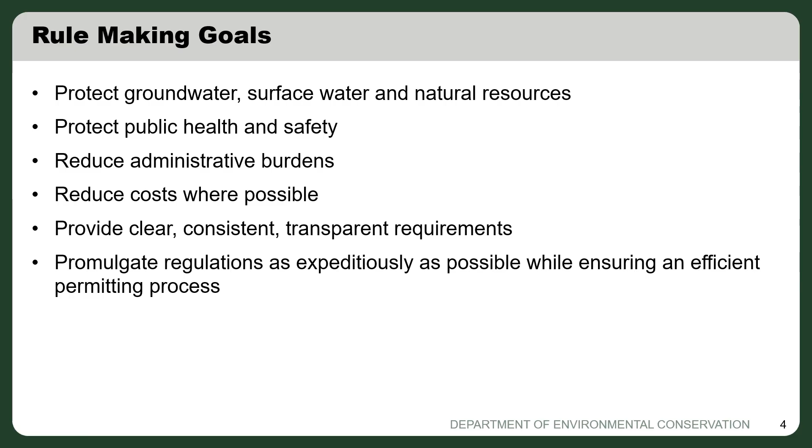The rulemaking will focus on the drilling and installation of deep, closed-loop geothermal boreholes and deep closed-loop stratigraphic test wells drilled deeper than 500 feet. It will not address a whole host of other issues, including open-loop or standing column geothermal wells deeper than 500 feet, which are regulated under the existing Article 23 regulatory program. The rulemaking will not address any type of shallow geothermal well, and as Kevin said, will not address disposal of drilling fluids and waste generated during drilling and completion operations.

These are addressed by existing regulations, which Beth and Kathy will speak to shortly. The rulemaking will not make any changes to other DEC permits that may be required based on project locations, such as wetlands or stream crossing permits, for example. But ultimately, our permitting process that should result from this rulemaking will help to make sure project proponents are aware when other DEC permits, other than the Article 23 permit, are required for their project.

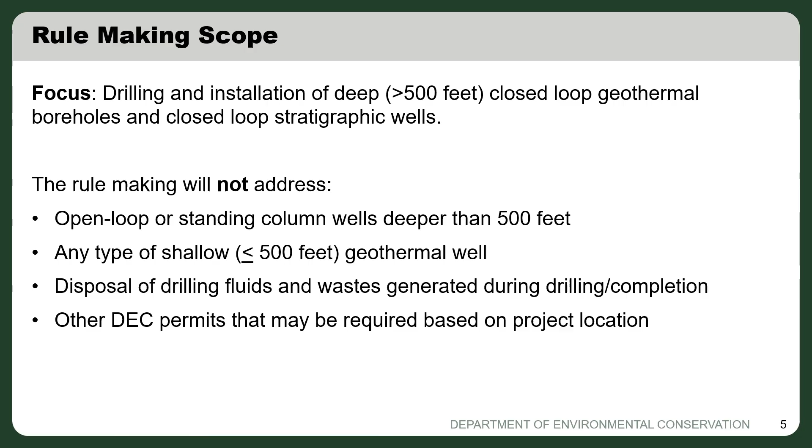As currently envisioned, the rulemaking will be organized into 4 parts. Existing Part 550 of our regulations will be revised to include definitions related to geothermal boreholes and stratigraphic wells. A new Part 561 will be added, specific to closed-loop geothermal boreholes. A new Part 563 will be added, specific to stratigraphic wells. At this time, it will be exclusively focused on closed-loop stratigraphic wells and may extend in a future rulemaking through a separate process to other stratigraphic well types.

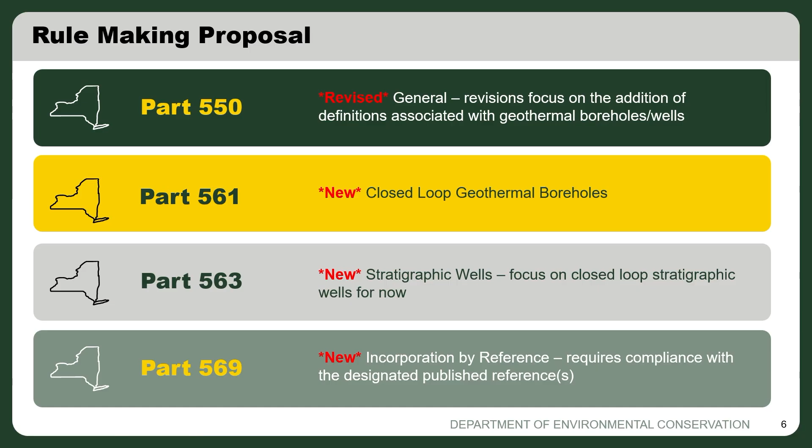We will also be adding a new Part 569, which is incorporation by reference. Ultimately, what that will do is incorporate certain industry standards into the regulation by reference. DEC is considering standards and references from CSA, IGSHPA, the National Groundwater Association, the American Petroleum Institute, and ASTM as we develop this rulemaking. Should these be incorporated by reference into the final rule, the industry would need to comply with them in the same manner that they will need to comply with other aspects that are explicit in the final regulations.

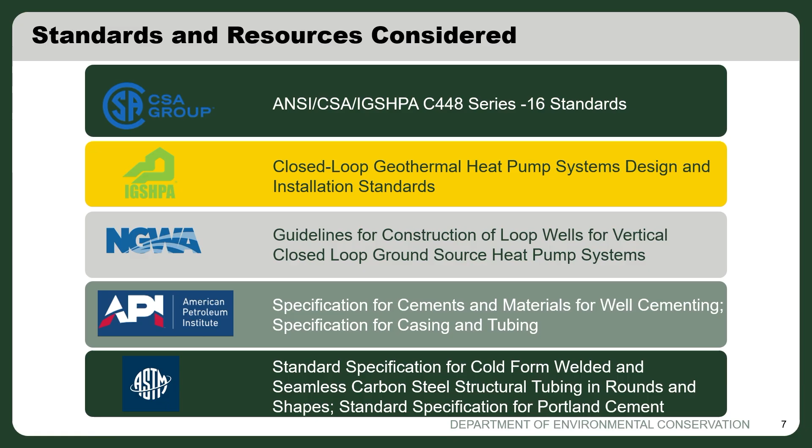DEC is envisioning several components to this rulemaking, but I want to emphasize that the ideas I'm sharing here today are just DEC's ideas at this time. We are very early in the rulemaking process. The requirements of the final regulations will be informed by stakeholders like yourselves and the public through the rulemaking process, and are therefore subject to change from what we're going to discuss here today.

So as currently envisioned, we are considering requiring a drilling permit for each closed-loop project, and therefore we're considering permit application requirements. We're also considering qualified contractor registration requirements to help ensure that permits are issued to knowledgeable entities and that a designated party is accountable to DEC for each project.

The rulemaking is also envisioned to include appropriate borehole setbacks and surface restrictions from sensitive environmental receptors, utilities, and property boundaries. We're considering borehole design, drilling, and installation requirements as key elements to the regulations, and we'll touch on this in more detail in a moment.

In addition, we are requiring reporting requirements at the time of completion, and decommissioning requirements to help ensure that boreholes are properly closed at the end of their useful life.

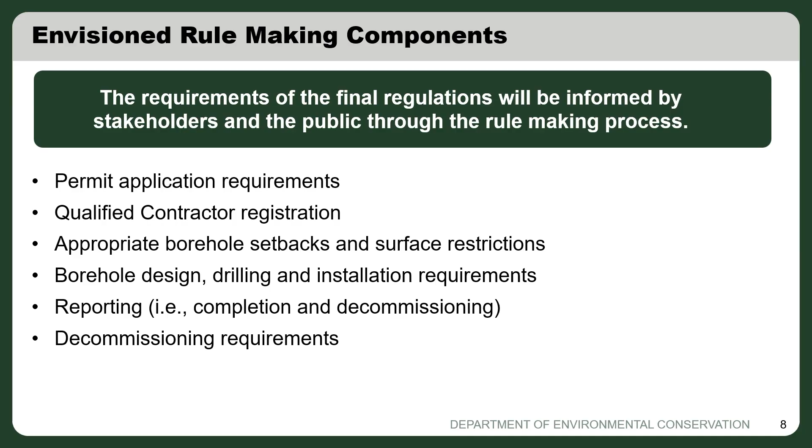Drilling, design, and construction requirements will be a key aspect to the regulations and must take into account New York State's diverse geology and its drilling history. In many areas of New York, especially in Western New York, Central New York, and the Southern Tier, there's an increased risk of encountering natural gas, oil, and brine in the subsurface, especially when drilling deeper than 500 feet.

So this is the origin of the 500-foot rule in the Environmental Conservation Law, which was not intended to limit drilling deeper than 500 feet, but was intended to ensure that additional protections are in place when doing so.

So New York has a pretty rich history of drilling. An estimated 75,000 oil, natural gas, and brine wells have been drilled in New York since the late 1800s. Of these, over 14,000 of those wells are still active and regulated by DEC today, as indicated on the map.

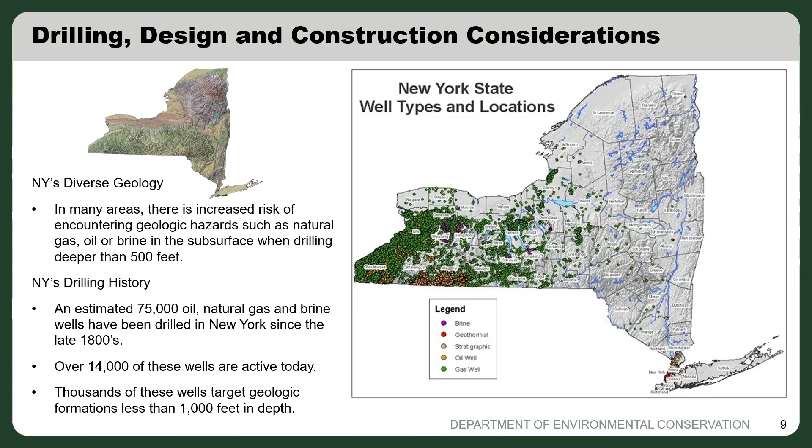Thousands of those wells, particularly in Western New York, target geologic formations less than 1,000 feet in depth, and therefore would be right in the depths that closed-loop geothermal wells are interested in going deeper to. So therefore, those borehole drilling and design construction standards for closed-loop boreholes and wells are critical to protect aquifers, the environment, and public safety in areas with increased risk of encountering these hazards in the subsurface.

DEC is therefore considering requirements for the installation of permanent surface casing, which is seated into competent bedrock and below deepest fresh water, and permanently cemented in place, and that conforms to American Petroleum Institute and ASTM standards in such locations where there is increased risk.

Additionally, DEC is considering grouting requirements to help ensure subsurface fluids and gases cannot migrate to the surface through the wellbores. We are also considering requiring the use of blowout preventers or diverters during drilling in areas with increased geologic risk, to ensure that pressurized gases and fluids can be contained or directed away from drilling rigs if they are encountered.

DEC recognizes, however, that as serious as these risks are in certain locations, they do not apply statewide, and therefore we're considering how to account for these variations in our regulations so that areas without these risks are not subject to unnecessary requirements. Because as I said at the beginning of my presentation, our rulemaking is also aiming to ensure cost reduction and efficiency where possible.

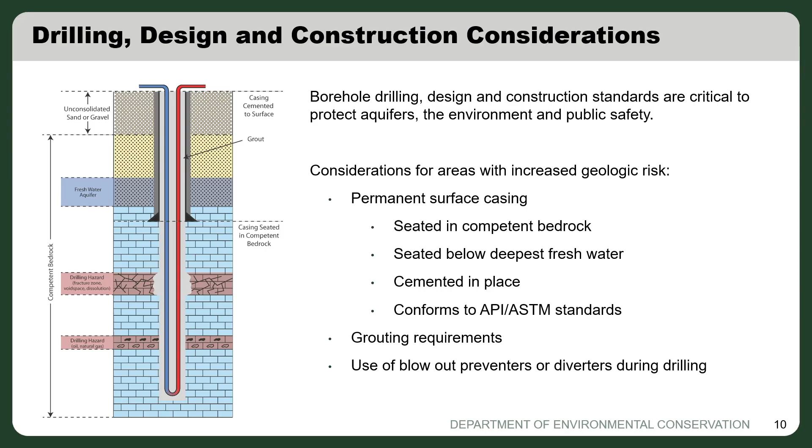To that end, we are currently envisioning a regulatory program that does not include financial security requirements, nor does it include annual reporting to DEC.

We're envisioning a permitting process that involves issuance of a single drilling permit per project, whether that project is a single borehole or multiple boreholes. We're envisioning a nominal project-based application fee with exemptions for federal, state, and local agencies. And concurrent with the rulemaking, we are working to create streamlined application forms, completion reports, and decommissioning reports that are specific to closed-loop wells.

Finally, we're working to develop a generic environmental impact statement, or GEIS, specific to these closed-loop wells deeper than 500 feet. For those not familiar, a GEIS evaluates separate actions, such as individual drilling permit issuance, that have common environmental impacts. The GEIS will satisfy state environmental quality review requirements for the rulemaking itself and for future permitting processes associated with drilling permit issuance.

So this GEIS is really key to efficient permitting once our rules and regulations are in place. The GEIS will evaluate potential environmental impacts from the drilling and installation of closed-loop wells and will make recommendations on ways to reduce or avoid adverse environmental impacts.

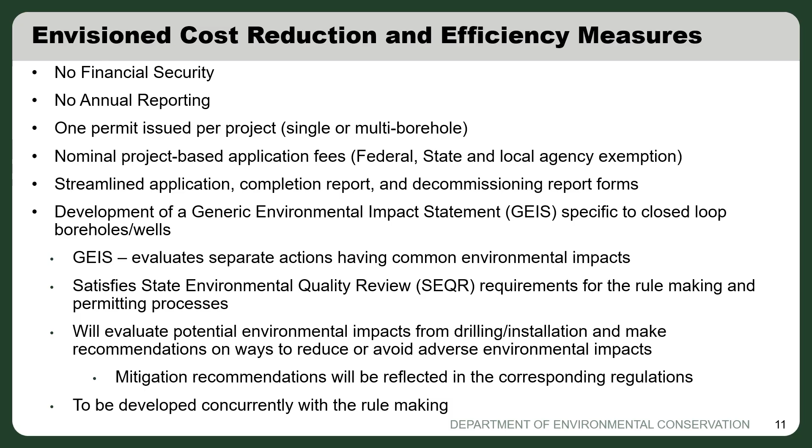Those documents will be released for a 30-day public comment period during which written comments will be accepted by DEC, and we will hold stakeholder outreach meetings where verbal comments will be accepted as well. When those comment periods come to a close, DEC will evaluate the comments received, make any necessary changes to the scope, and issue the final scope to the GEIS.

Also during this time, we will be reviewing our rulemaking package, the actual draft express terms, and working on the GEIS itself. We will then release the draft rule package or regulations and the draft GEIS for another public comment period. That public comment period will include public hearings where verbal comments will be accepted, and will include an opportunity to submit written comments. Again, similar to the first comment period, after the comment period closes, we will review the comments received and make appropriate changes to the final rule and to the final GEIS.

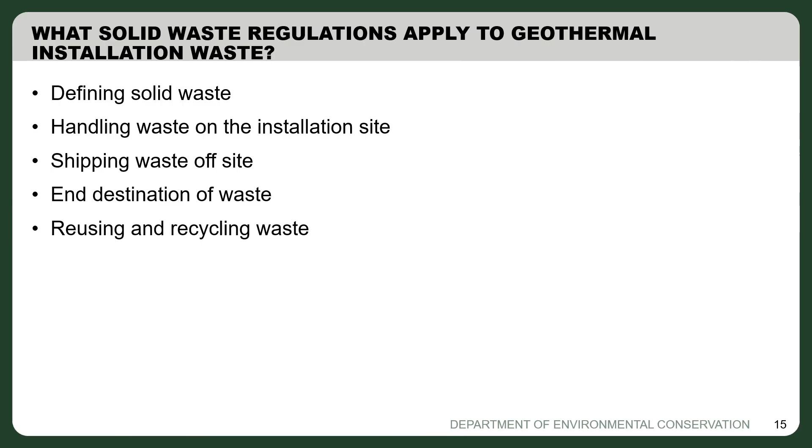And finally, reusing or recycling waste, which, given my background in materials management—I'm coordinator of the New York State Beneficial Use Program, and we do a lot of repurposing of industrial, commercial, and construction byproducts, including drilling waste—so that's especially near and dear to me, the last bullet there. A big thing about solid waste under state rules: it doesn't have to be solid.

Most of the waste you'll encounter in your installation activities will be drill cuttings, but many fluids are generated too. If you need to containerize these for off-site transport and disposal, they're also under the purview of solid waste regulations, particularly for transport, until they reach their place of treatment.

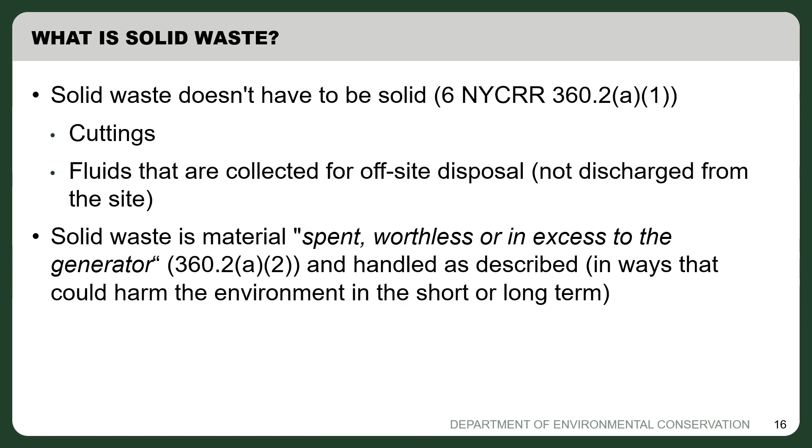In general, solid waste is anything that's spent, worthless, or in excess to the generator. That's a basic definition. And if it's handled in ways that could harm the environment in the short or long term, that's a quick summary of what the regulation says. So that's a pretty broad definition, but I'll talk about the exemptions and exceptions here.

There are two kinds of cuttings as solid waste. Carrie talked about above and below 500 feet. If your planned depth of boring or installation is under 500 feet, we regard the cuttings as an excavated material, just as if you went in with a backhoe and dug out some soil or blasted some rock. It's part of construction and demolition debris. I've given the regulatory references there. There are a lot fewer requirements for that, as long as it's clean, not contaminated with petroleum or anything you might have encountered—hopefully unlikely at that shallow depth.

Greater than 500 feet below ground surface planned depth, it becomes drilling and production waste. Carrie talked about changes to the regulations. Our solid waste regulations match what would be the old, or soon to be old, regulations more so than going forward. In the future, when we do our next rulemaking for solid waste, we may try to align our requirements with mineral resources regulations more so. But for the present, if you're below 500 feet, it's drilling and production waste as defined in the regulation I cite there, and it's considered an industrial waste.

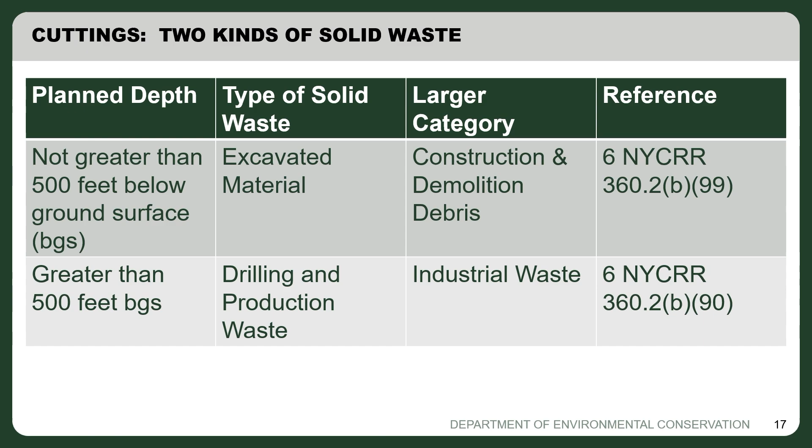If cuttings are in the excavated material category under 500 feet, all kinds of possibilities exist. If there's air or water as the drilling fluid, we have fill regulations—you can keep it on site, send it off site as clean fill, or dispose of it on site with owner approval. You could take it to a C&D debris landfill, which might be an easier, cheaper alternative than a municipal solid waste landfill or an industrial waste landfill. Might be a cheaper option for you. And if you're transporting it, if it's C&D debris under 10 cubic yards—the size of a small dump truck—no waste transporter permit or registration is required upstate.

If you're in the New York City area, it's a different story. Rules are stricter there for transporting waste.

But even if you're using other drilling fluids, if they're water-based—the second column here—you want to dewater them on site if you can. That's always a good option. You can still take them to a C&D debris or a municipal solid waste landfill, or dispose of them on site again with owner approval. I had a water well put in recently, and my husband and I didn't mind the bentonite river flowing through our orchard, but it depends—maybe your property owner will want things cleaned up a little bit better. And again, the exemption for less than 10 cubic yards applies for transport.

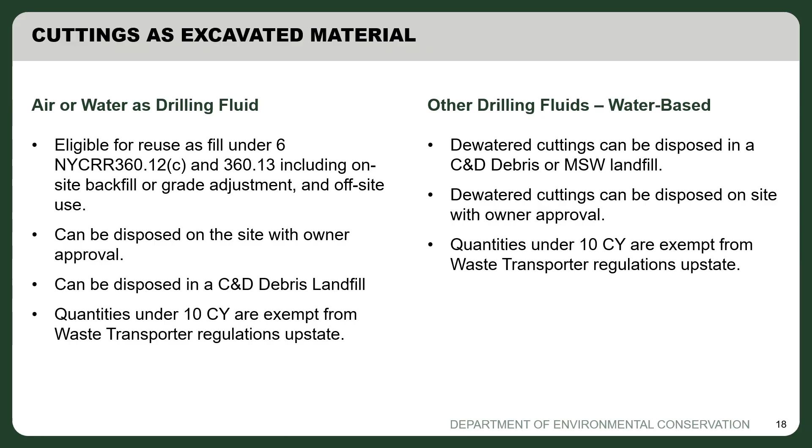If it's drilling and production waste, things get a little more tricky. We've made a policy decision—I don't know if it's ever been put out in any public document—but during the discussion of handling hydraulic fracking cuttings and so forth, we determined that if there were water-based drilling fluids, or air or water, you could take those to a C&D debris landfill regardless of depth, even though they're drilling and production waste. So that's a help for folks doing geothermal.

There's a clear exemption in waste transporter requirements for cuttings that are just rock chips. And again, we have an exemption if it's just air, water, and rock, to dispose of those on site with permission of the owner. Other drilling fluids, again, if they're water-based, you can go to the C&D debris landfill, even though it's not technically C&D debris—it's drilling and production waste.

Otherwise, you need to take it to a municipal solid waste or industrial landfill that will take industrial waste, and you've got to fill out the appropriate paperwork. You guys are still under the Bevill exemption as far as I know, so there's no hazardous waste testing involved, but you've got to do all that other stuff. Waste transporter permits are required to transport that kind of waste, and that's anything over a ton.

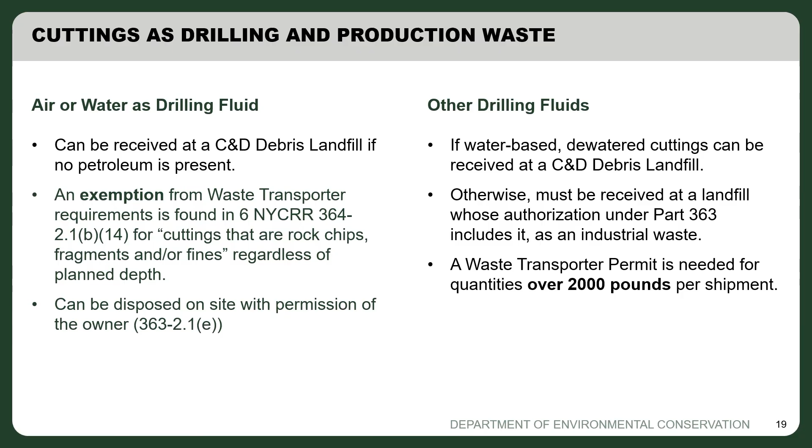But hopefully not. And I mentioned about containerized liquids, anything not meeting the paint filter test, which is a very common test used for waste going to a landfill. New York State landfills can't accept bulk liquids. They can't accept bulk liquids.

So you want to make sure to dewater whatever you can on site as much as you can. These kind of things, if you've got a frac tank there, or if you're taking it off site, you need that transporter permit.

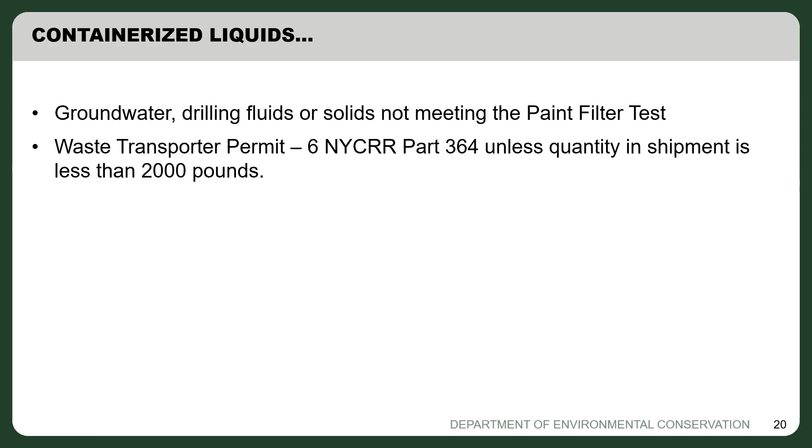I think many of these cuttings would make an excellent substitute for mined materials, obviously.

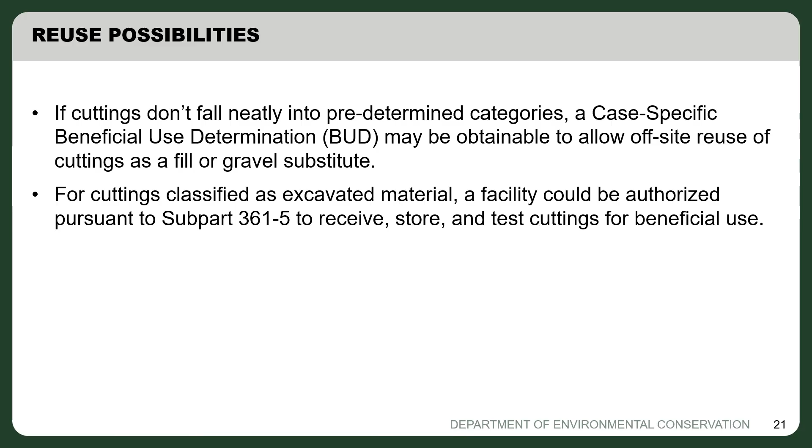And that's it on my slides there. I did bring today, I only have a few copies of this, but this is a little document that Carrie and the group asked me to put together to summarize solid waste requirements.

It's called Managing Solid Waste, a guide for industry, and it includes a flow chart with regulatory references at the back. I brought a couple of paper copies today, and I'd be glad if you contact me at the address below. This isn't on our website, but I can send you the PDF version if you'd like, and hopefully you'll get these in the proceedings and be able to use the links, or it's simple enough to find on our website.

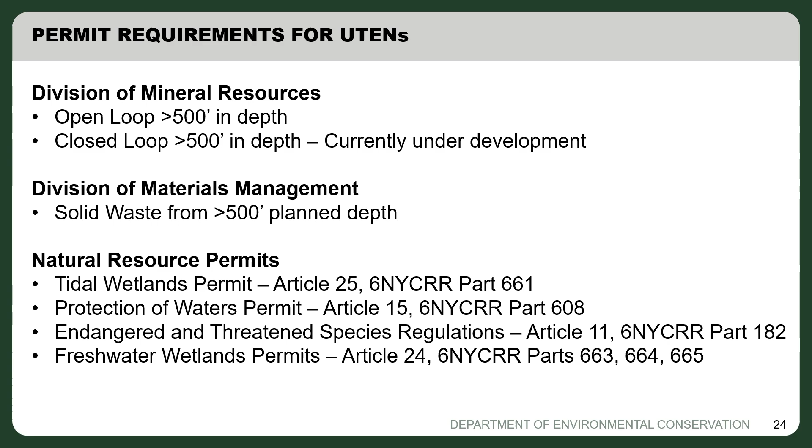The fourth one listed there is freshwater wetlands permits. They did ask me to expand on that. Actually, the well drillers asked me to expand on that. So I did get some information, and I'm happy to share that with you all today.

So the Freshwater Wetlands Act was passed in 1975 and amended in 2022. Their new regs went into effect on January 1st of this year, hence the questions from the well drillers. The changes are that jurisdiction is no longer tied to maps. They regulate wetlands and adjacent areas, and they regulate larger wetlands, which are greater than 12.4 acres in size. But in 2028, that size will decrease to wetlands greater than 7.4 acres in size.

They also regulate smaller wetlands of unusual importance. That unusual importance is defined on their website. There are 11 different items that are listed, and that's all I know about.

Okay, so the determination process. You apply, and then DEC will go through these 3 steps. First, they will determine if there are state jurisdictional wetlands or adjacent areas within the parcel or property boundaries. Step 2 is their wetland delineation, where they will determine the extent of wetlands and adjacent areas on the parcel or property. And step 3 is to determine if a project will require an Article 24 permit.

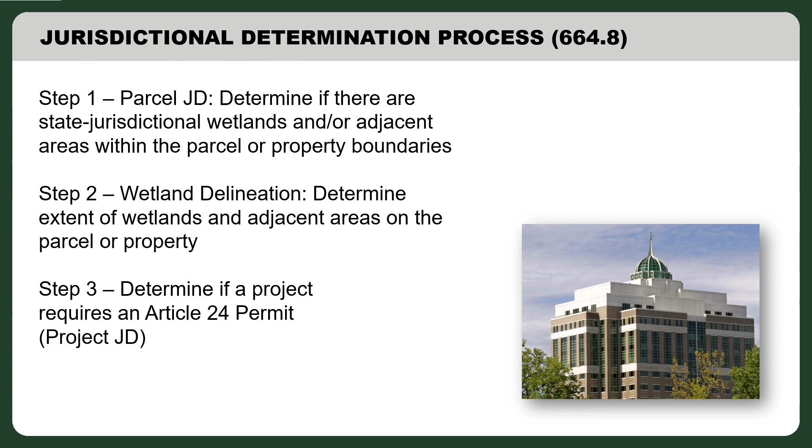So you can go to DEC's website to fill out the online jurisdictional determination request form. It's a really simple form. I didn't fill it out, but it really had hardly anything on it. You do have to allow pop-ups. If this is for a landowner, all you need is the parcel ID, which needs to be in the correct format that you can obtain online from your local real property services. You need your physical address and then just your contact info.

If it's for a private company or an NGO, you're going to need that same information and also the company name. And we always at DEC appreciate shape files. It's not required, but very helpful if you're able to provide that for those larger sites.

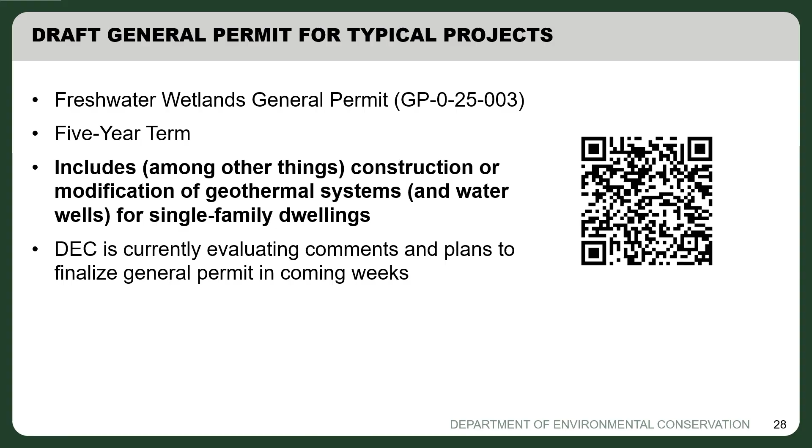So they've drafted a general permit for typical projects that's currently drafted, and they're evaluating their comments and plan to finalize it in the coming weeks. So that general permit would have a 5-year term. And important for geothermal is that it includes construction or modification of geothermal systems for single-family dwellings. And for the well drillers in the room, it also includes water wells. So you should be set for 5 years. After that, I don't know. We'll see what happens.

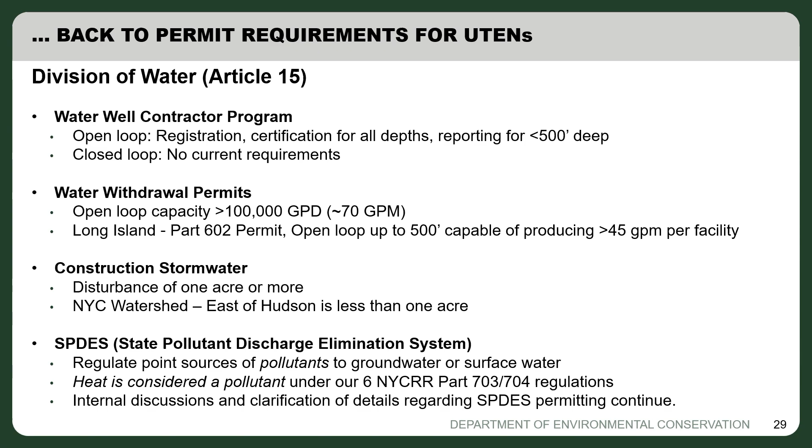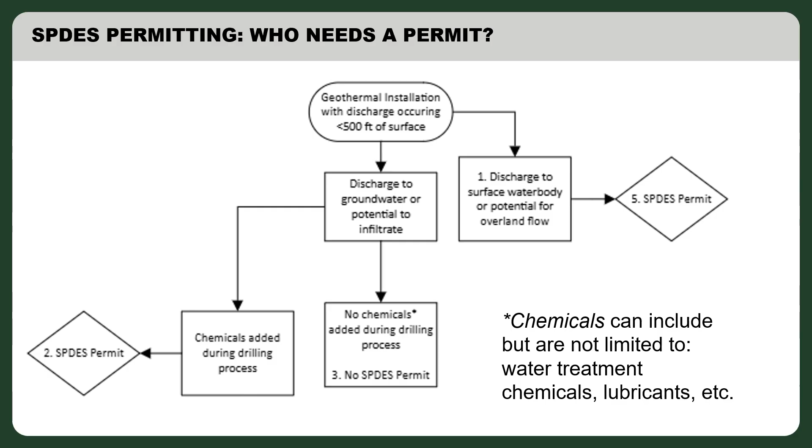However, if you encounter a pollutant during drilling, your first option is always to hold and haul, which I know everybody gets super excited about, right? So your second option is going to be to consult with DEC, and we can discuss your different options. Just come to us with your plan, possibly discharge back to the same hydrologic strata that you got the water from, or maybe get a SPDES permit. So we can discuss that with you.

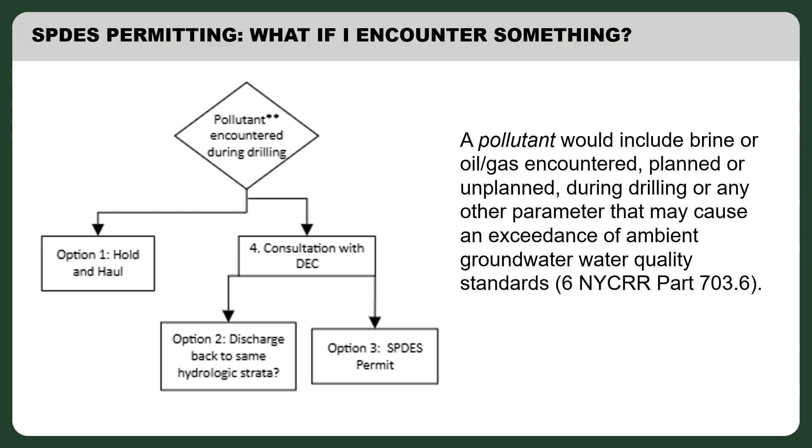These pollutants that you might encounter would include brine or oil and gas that you encounter during drilling, whether it's planned or unplanned, and any other contaminant that might cause an exceedance of ambient groundwater quality standards. And what would a SPDES permit look like? For construction and operation, they require flow monitoring, water treatment chemical reporting requirements, permit limits for water treatment chemical parameters, and at least annual reporting requirements.

For operation only, and this would be for open loop systems, you're going to have temperature monitoring or limits, 90 degrees for non-trout waters, 70 degrees for trout waters, and delta T limits in coastal waters. And very large discharges may require a thermal study in the SPDES permit to determine if there are thermal impacts.

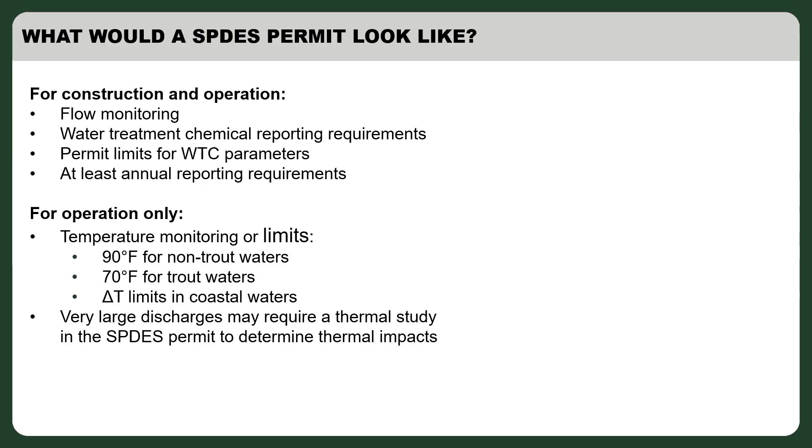All right, moving on to legislation. So this has been a hot topic for quite some time in the water well drilling community. DEC has been engaged with the Empire State Water Well Drillers Association since 2019 regarding geothermal drilling. We have drafted legislation. It did make it up the hill, was seen by the Senate, and then did not get beyond that. So that was in 2019. So we continue to have discussions with the water well drilling industry and more recently with the geothermal industry.

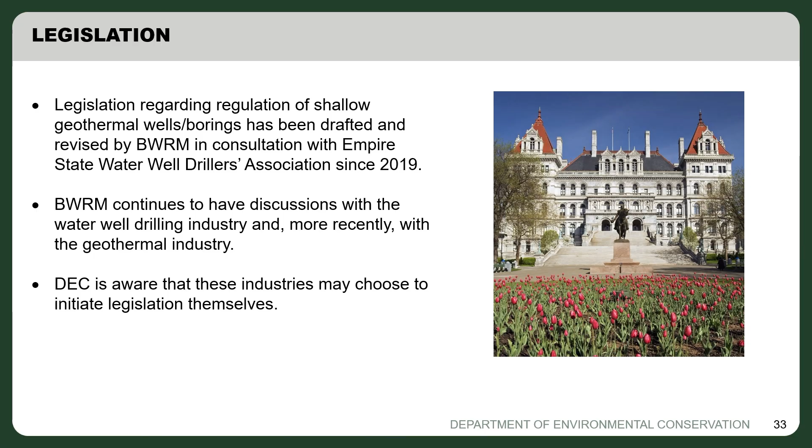So it could be difficult for DEC to pass a new law, and we're aware the industries might initiate some legislation themselves to protect the environment to an acceptable degree, and at the same time be a benefit to the industry by having DEC maintain a database of geothermal wells or boring records. So a little disclaimer, other laws and regulations may apply on a site-specific basis as determined by DEC's Division of Environmental Permits and individual DEC programs. So refer to DEC's website for program details and contact information.

For general permitting questions, you usually would want to go to the regional permit administrator, but in central office, we have the Bureau of Energy Project Management and the Division of Environmental Permits, and there is their email address. For SPDES permitting questions, please contact Peter Maier. And for everything else, feel free to contact me. If it's not something I can help you with, I'll try to get you pointed in the right direction. That's it.

Vacate. All right. I'll grab your sign. And now we have Dave Rosick with the Empire State Water Well Drillers Association, past president. We just lost him this year. Stepped down. Well, we never go away. Yeah, we never go. Hello, everyone.

I'm Dave Rosick. I own Rosick Drilling. I've been on this panel last year, so I don't have to tell you the same thing as I did last year, but I've been a driller for over 50 years and still have all my fingers. That's pretty good. I'm here representing Empire State Water Well. A few of the issues that I had in mind were pretty much covered, so I went from a 5-minute speech to maybe 10 seconds because everything is pretty much done.

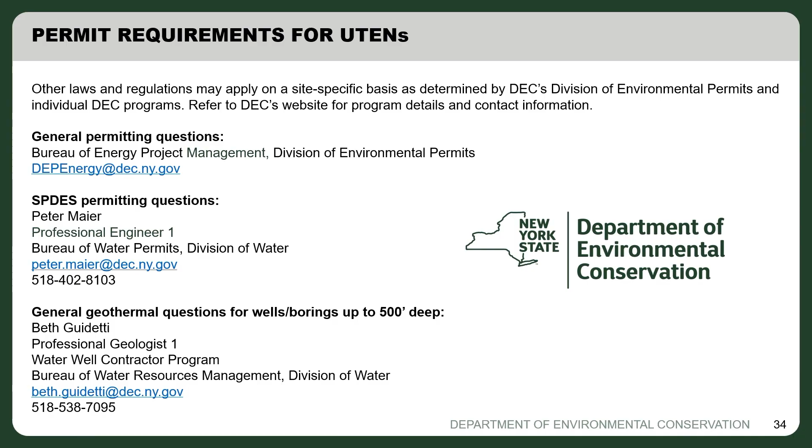Licensing was the main thing that we want to bring up as Empire State. And I believe it's important that drillers on residential are licensed drillers. On big projects where there's many, many bores, we feel there should be at least one qualified individual. And that mainly is because on residential, many residentials have a water well there along with it, and you might be 20 feet from it. So it's important to be a registered driller and have experience, not just a paper from a test you pass when you've never been on a drill rig. So we'll see how that goes. Like I said, a lot of the other things Carrie, Beth, and Kathy answered already.

The other thing I wanted to commend the DEC on was their mapping. The new mapping they have for water wells is so useful. We bring it up all the time: well, this guy did this, and this water table's here. And it would be so nice to have geothermal bores in that too.

And I don't mean every one for a 100-borehole project, but maybe a generalization of a large field, what you encountered from one end of it to the other, and the residential is important more than anything. You go give a price on something, it's really nice to know, am I bidding a job 20 feet to bedrock or 200 feet to bedrock? Big difference in the cost of a water well, and especially a geothermal system where there's many boreholes.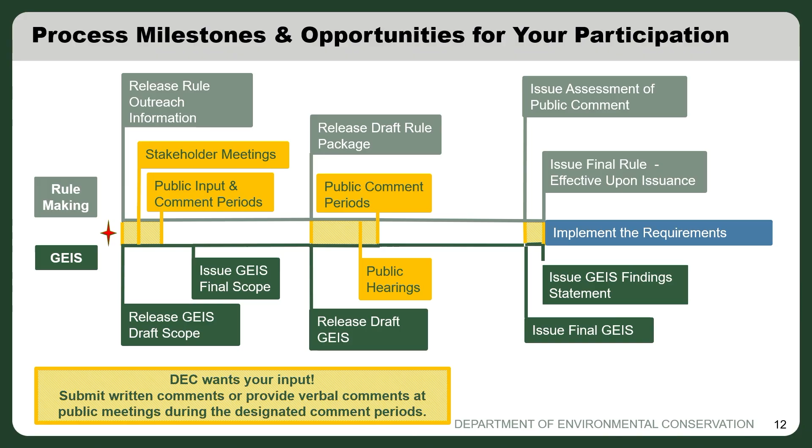We have international experience entering New York State now. So there's a lot of ability, a lot of knowledge, a lot of good. But just because you can do it a certain way someplace doesn't mean you can do it that way in New York State. New York State's going to have their own laws, which is ideal.

Rami Gerges from ME Engineering here. Regarding the engineering document, when we issue a specification for drilling or anything, this is mainly for the drillers. We don't list all the types of permits based on the depths. Is that required, or do we just say the driller has to obtain the necessary permit based on the depth of the well? What is the appropriate way to address that?

So I will throw this in there. You should know—you write a spec on everything. It should be on you so that when the bids come to you, they are all the same. Every driller is going to play by the same rule. Because from our perspective as drillers, if I know the rules and I call the DEC and build that into my quote, it doesn't necessarily go back to the engineering company.

It might go to the construction company. It might go to the MEP contractor. It might go to the prime sometimes, and we'll ask those questions. All these different things add money to a project.

Getting the owner of a project to agree to holding cuttings on site as opposed to having them removed—that's the spec a lot of engineers write in there, that the cuttings must be removed from site. And that matters significantly whether you're talking 500 feet or 510 feet, and the cost implications are massive. So I could bid you correctly, legally, and right, and be $500,000 more than the next guy. You go with the low bid, and now who's got the responsibility?